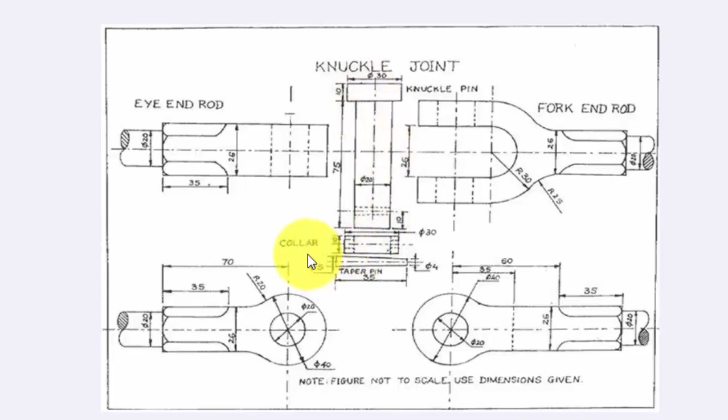So as you can see, there are three major components here. Let us see the detailed drawing. We are having an eye end rod, a fork end rod and a knuckle pin, and also there are some small components like collar and taper pin. So let us try to draw the components one by one, and finally we will assemble that.

Let us draw the first component, that is a fork end rod, today. Let us open the Catia software and go to Start, Mechanical Design, Part Design, and we are drawing this fork end rod. So let us name this as fork end.

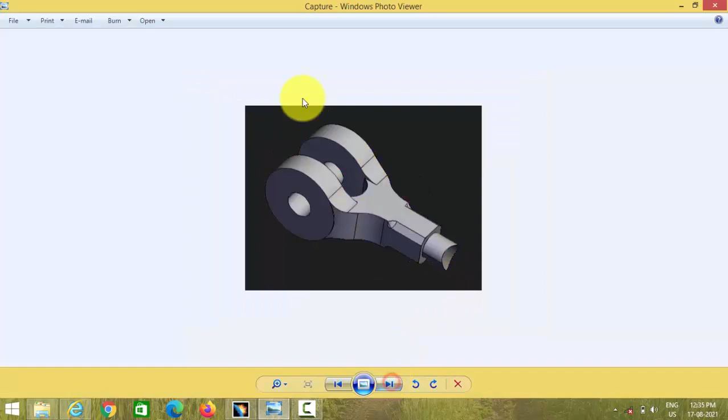Now we have to draw this component first. So in order to draw this component, we can draw this top face and we can extrude that, otherwise we can pad that. So for drawing this top surface, we have to draw this particular arc and this circle. So by drawing these two circles, we can start drawing.

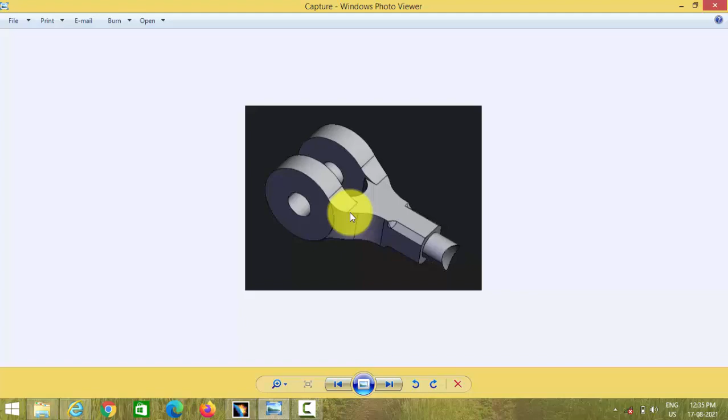So let us see the dimensions of those circles. This is having a radius of 30 mm and this is 26, so the inside radius will be 13. So let us draw two circles at the center. I am taking the top plane and starting sketch.

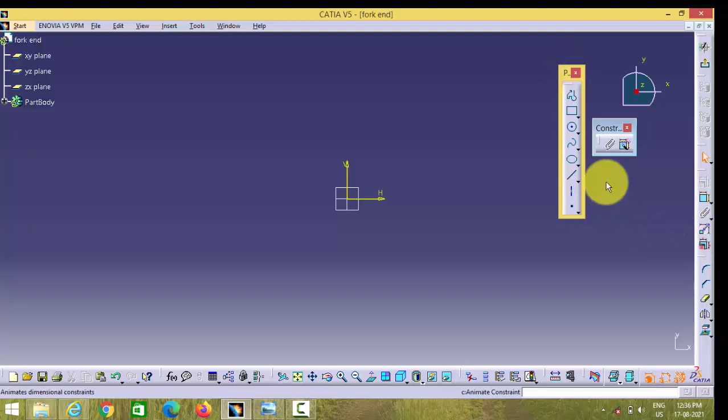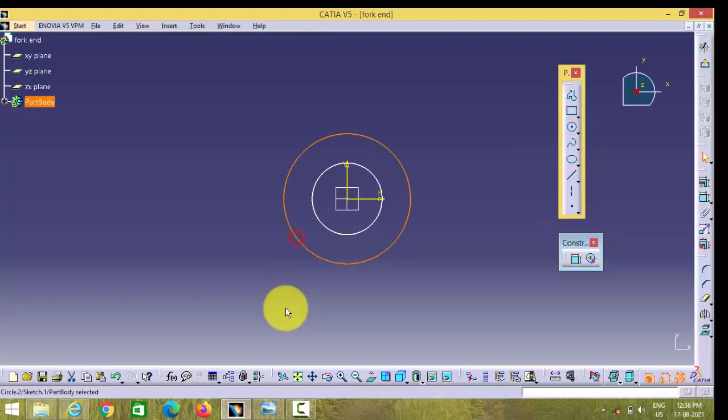So if you want the tools, we can drag that and we can place that anywhere. So I have taken this sketching toolbar as well as the constraints here. Okay, so let us draw two circles. That should be having radius of 30, another one is having radius of 13. So click that and go to this constraint, you will get the dimension.

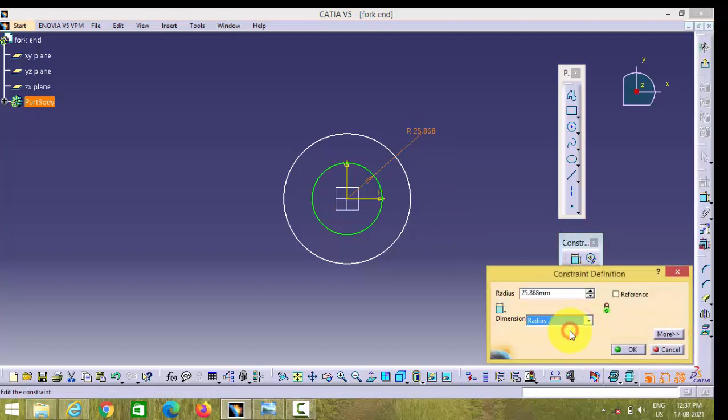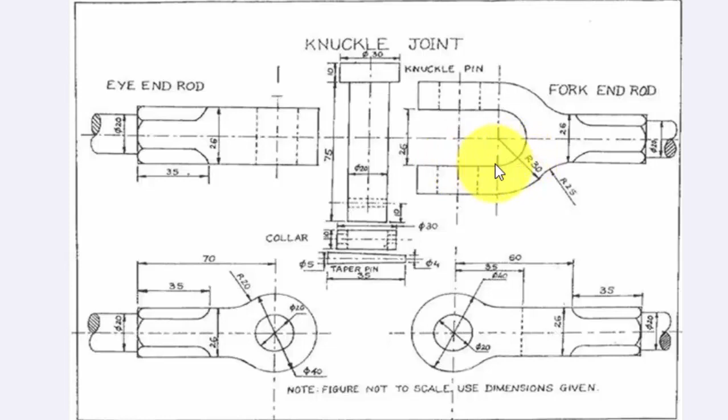So the dimension of this is, the radius is 13 mm and the radius of outside circle is 30 mm. We have drawn that. And then we have to draw two lines along this small circle that are tangent to that. So let us draw two lines, otherwise we can draw a rectangle.

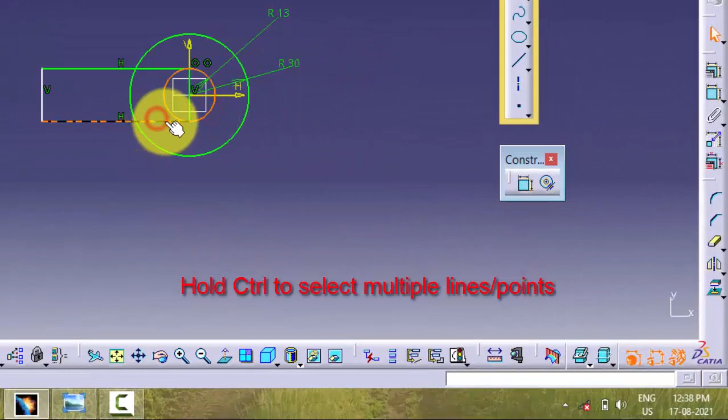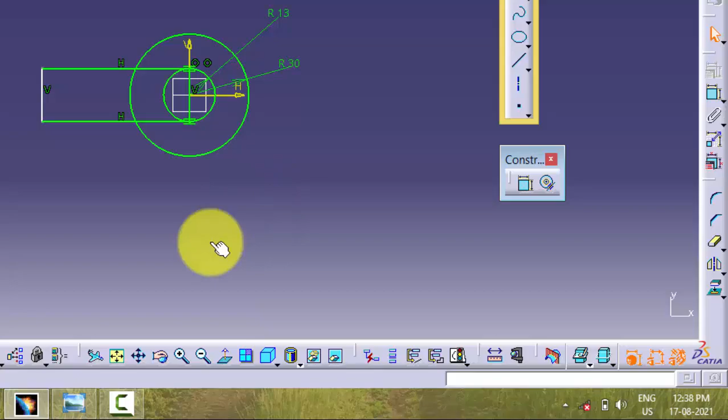Okay, we can specify this line as tangent to that circle. Okay, now we have drawn that line as a tangent to that circle. Here as you see, the dimension from this small circle to this point is 35 mm. So let us draw this rectangle up to 35 mm.

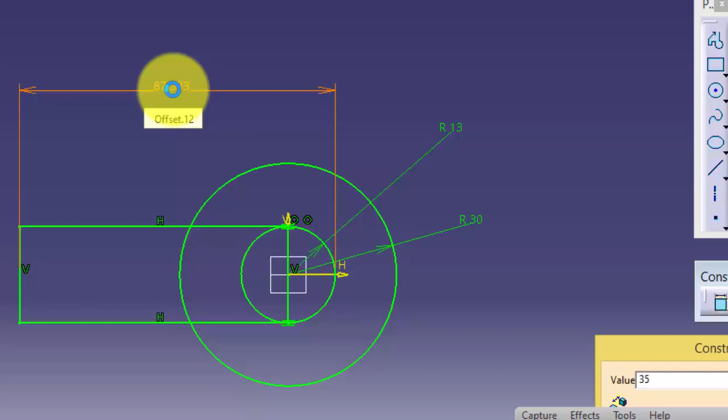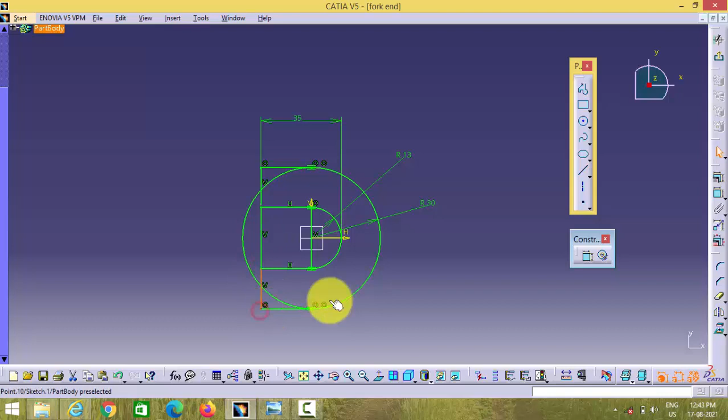This is 35 mm and we can trim these parts out. Here we can extend this line up to this point and we can draw a rectangle up to this point. So now we can trim these unwanted portions.

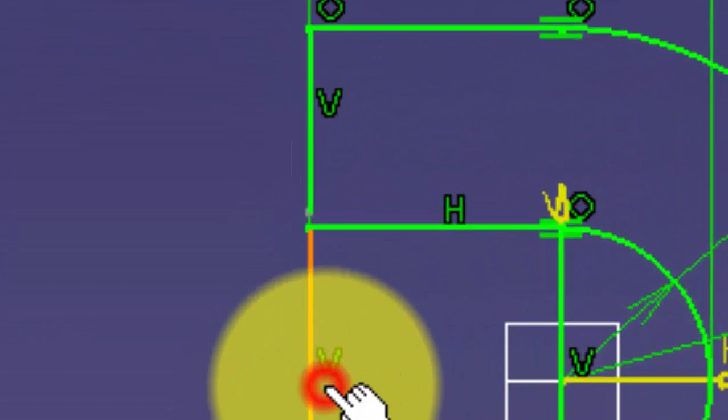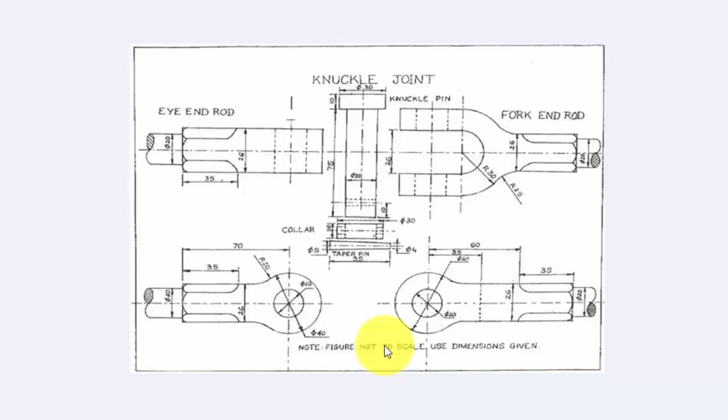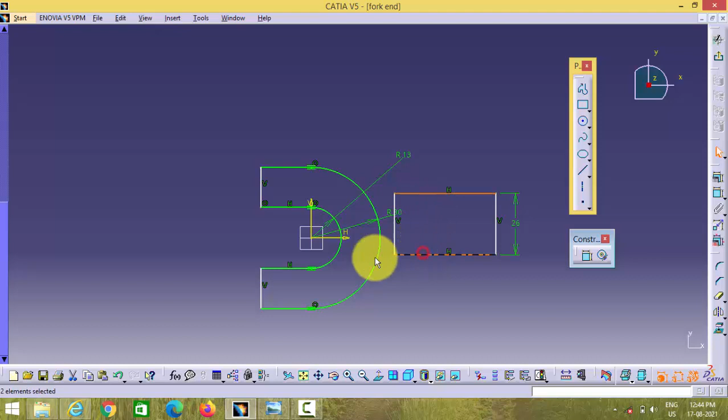These 2 points should be coincident, so let us give that as a constraint. Okay, here we are having a 26 mm square rod, so draw that 26 mm rectangle here. This rectangle is having a dimension of 26 mm and that should be symmetric to this center. So here we have to click these 3 lines and we have to give the constraint as symmetry. So now these 2 lines are symmetric to this.

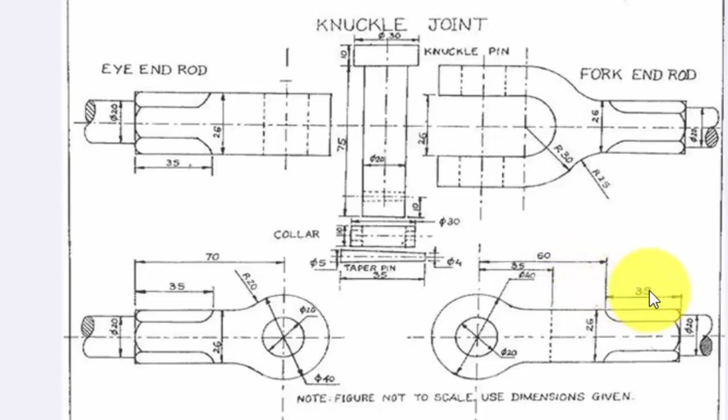Now let us see the length. From this point we are having 60 minus 35, so 25 mm here and 35 mm here. So 25 plus 35, 60. From this point we are having 60 mm here. From the small circle we are having 60 mm.

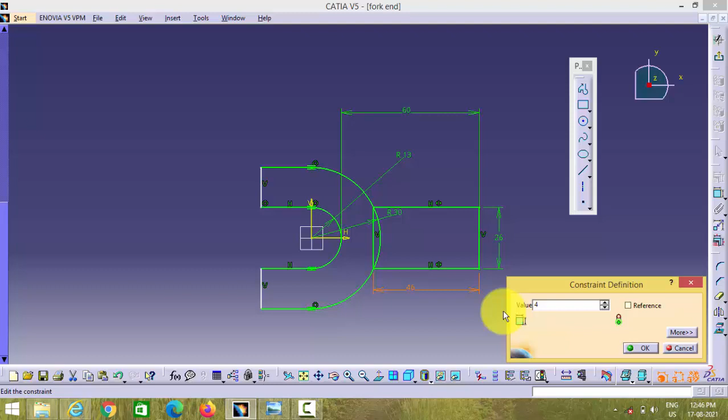Okay, now let us extend this line in order to trim that. This is actually 46. Let us make this as 48 so that it is easy to trim. Okay, now use this trim option and trim out these lines. Okay, now we have drawn this part and here also we are having a circle like thing. So let us try to pad this.

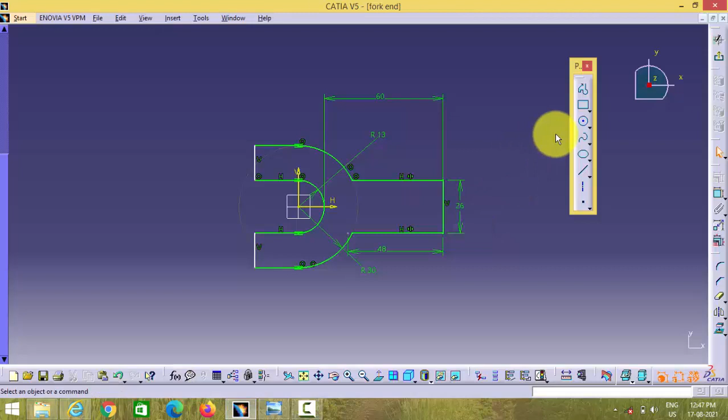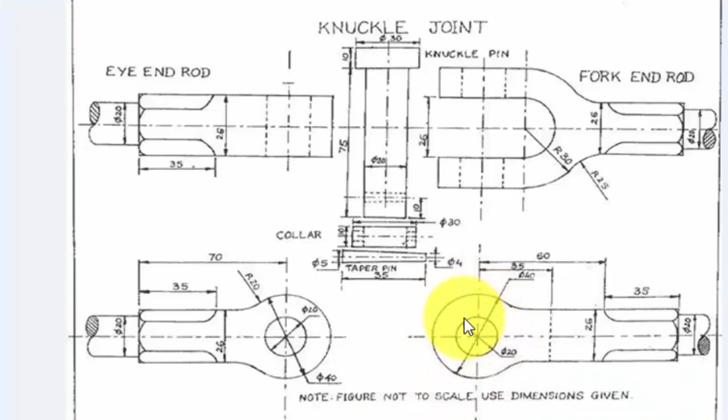Exit the sketch and go to pad, and we are having a dimension of, this is the top view of this, it is having 26 mm. So let us give 26 mm. So now we have created that partially. Now we have to create this circular portion here. We have drawn up to this particular point. So we have to create a circle over here, and from that circle we have to create this pad.

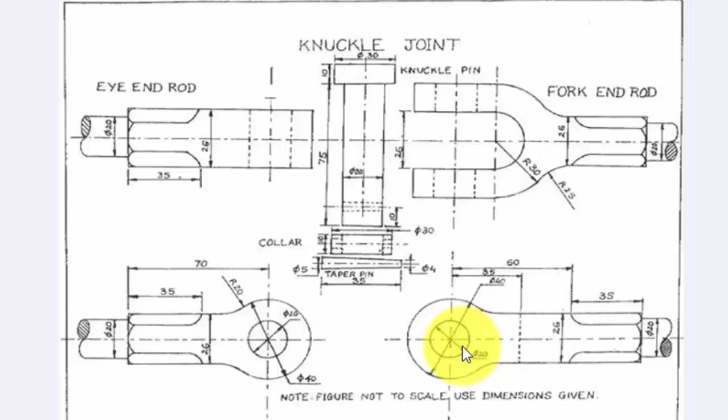Just select the surface and give sketch. So here we can draw a construction line. Okay, here we have to draw a circle. That circle should be having a diameter of 40 mm, so the radius should be 20 mm. Radius is 20 mm.

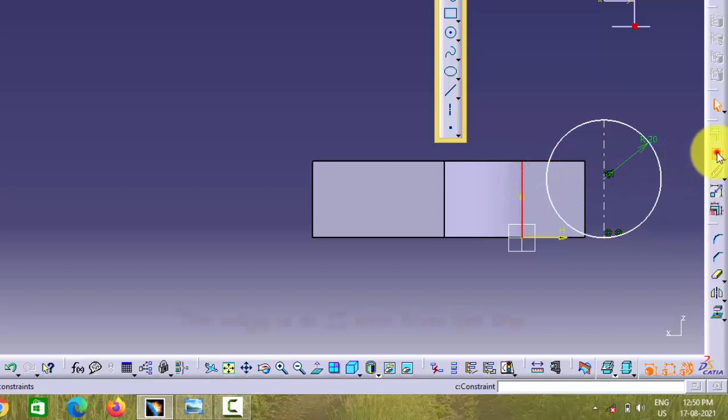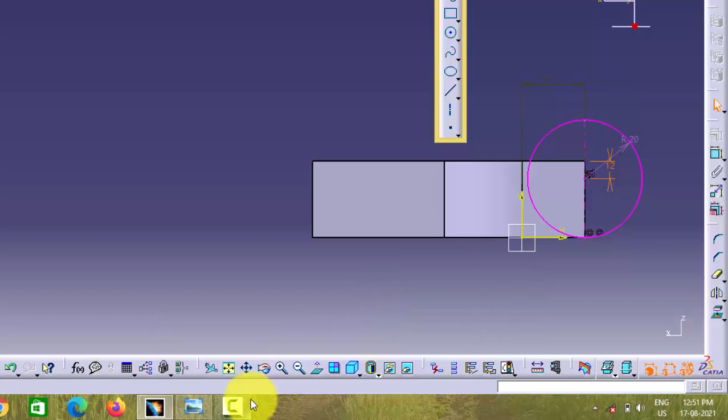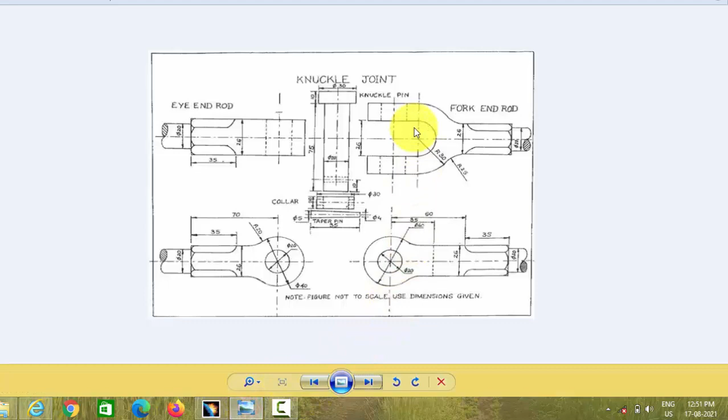Okay, now we have to keep this center point exactly at the center. So the total dimension is 24 mm, so if you give 12 mm, that will go to the center. Okay, now we can exit the sketch and pad this. Go to pad and we can reverse the direction, and we need to pad this for the dimension of 30 minus 13, that is 17 mm.

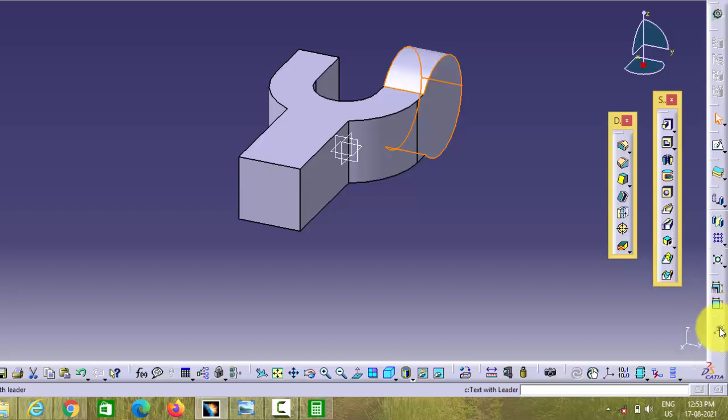Okay, now we have created that. So what we have to do is we have to mirror this to that other side. So select that object, select that pad and go to the mirror option. Here it is, and select the plane, and it will be mirrored like this. So now we have got this shape.

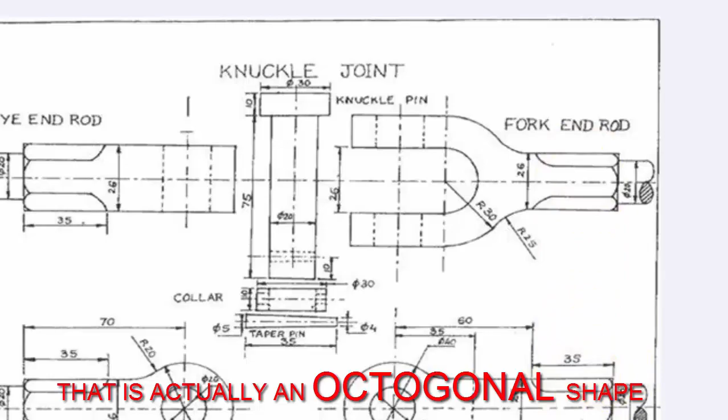So now we have to create an octagonal face like this here, up to 35 mm. So here we have to create an octagonal face. Already we have created that as a square, so now we have to change that to an octagon. So create a sketch there and draw an octagon.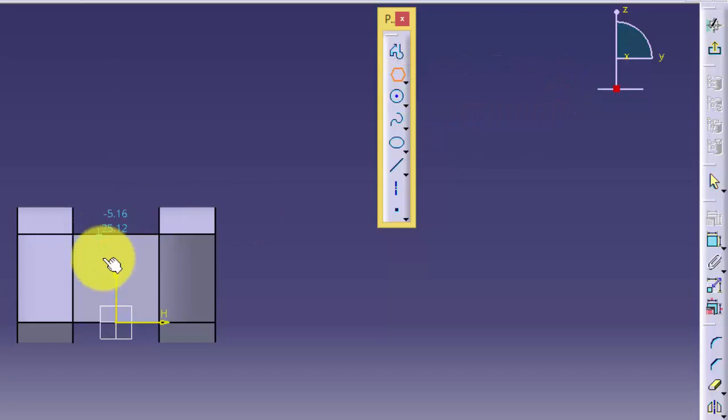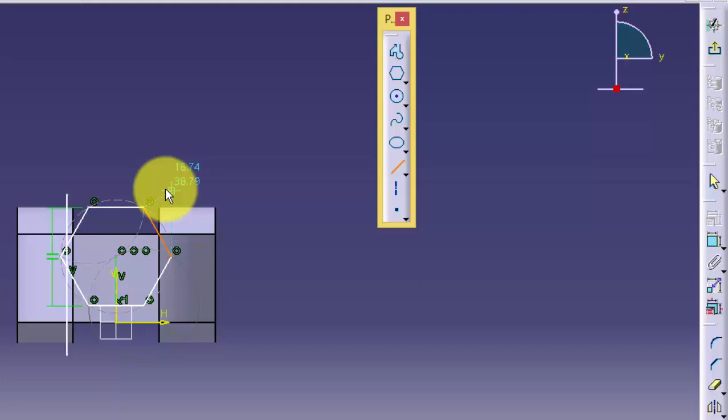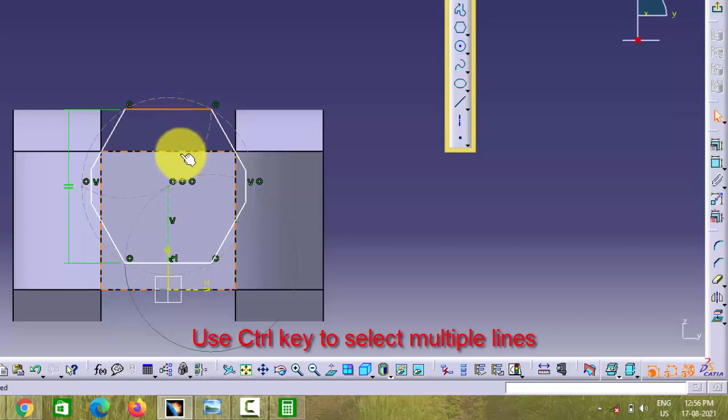Okay, make that hexagon into an octagon. Okay, now trim this. Trim the unwanted portion to make this hexagon an octagon. Okay, then let us give the constraints. So this particular line should be here. So select both the lines, go to constraint and give coincidence.

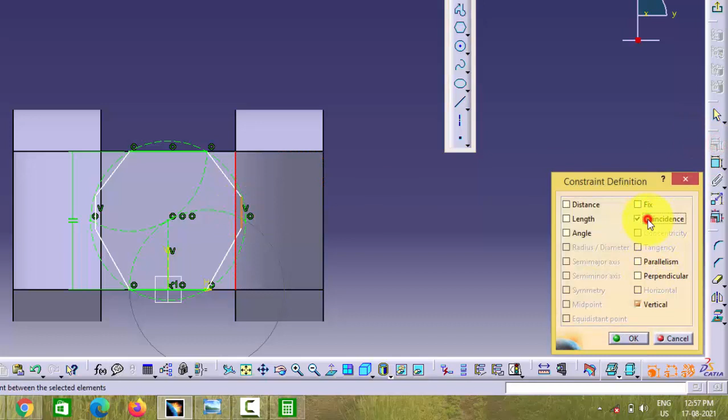Okay, similarly this line should be here. So give that constraint and give coincidence. Also this line should be here. Okay, then give dimensions for this. If you don't know the dimension of any part, just assume a dimension, that's not a problem.

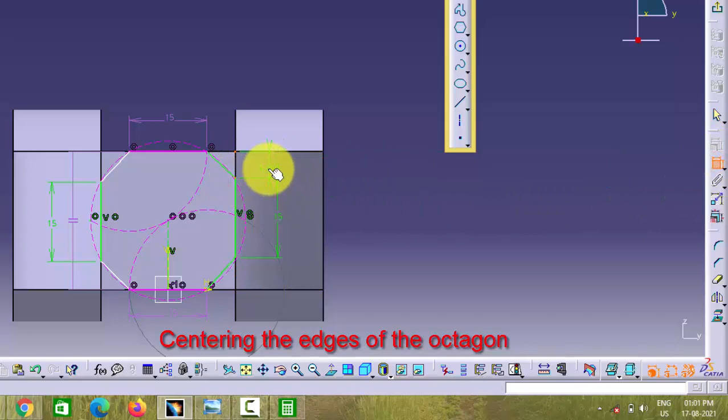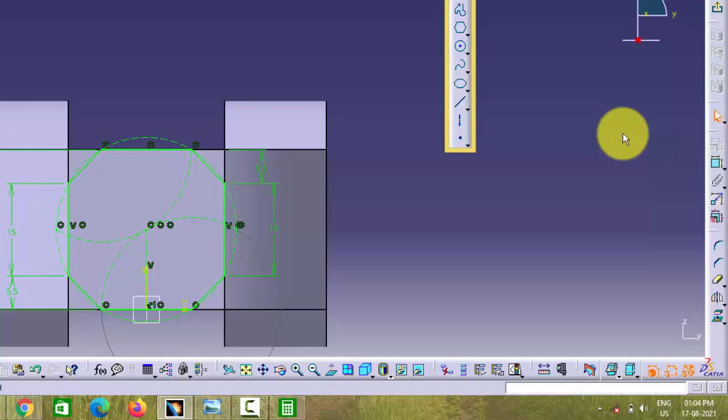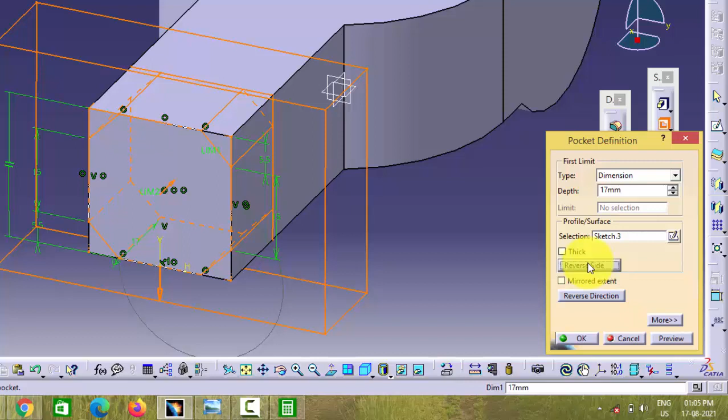Eleven mm will be remaining, so let us give 5.5 mm here. Okay, now let us give the pocket option and reverse the direction. Reverse this side, so the outer side will be removed, and let us give a depth of 17 mm.

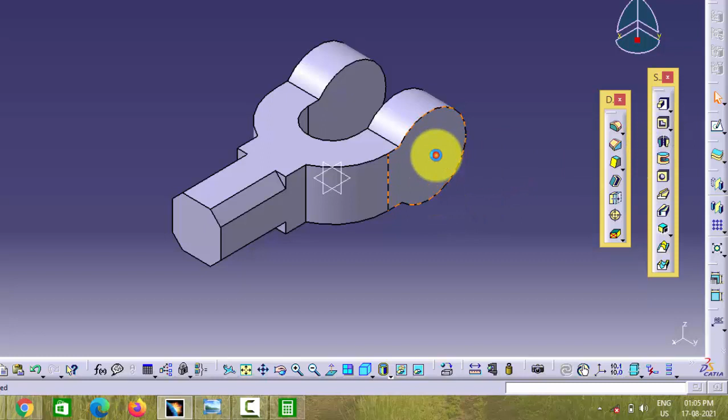Okay, now we got what we want, and now we have to create a hole over here. For that you can use the hole option, otherwise we can simply sketch it and use the pocket option. The diameter of the hole is 20 mm, and the depth is up to last.

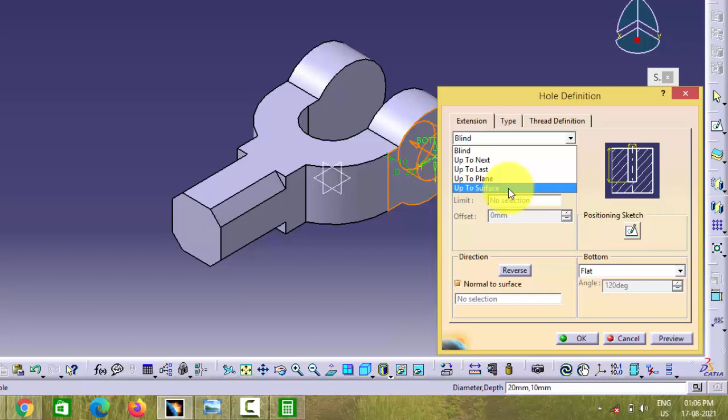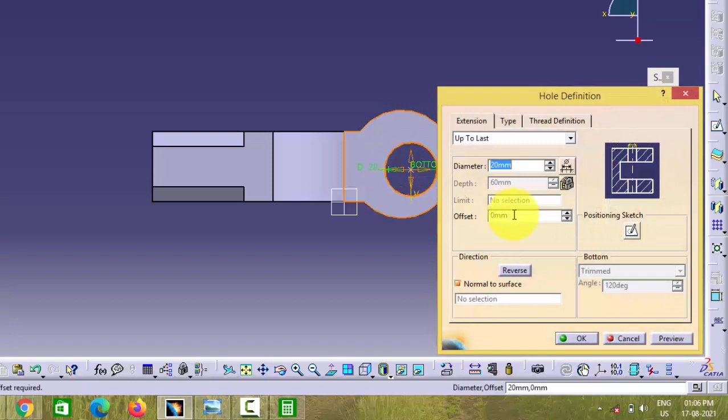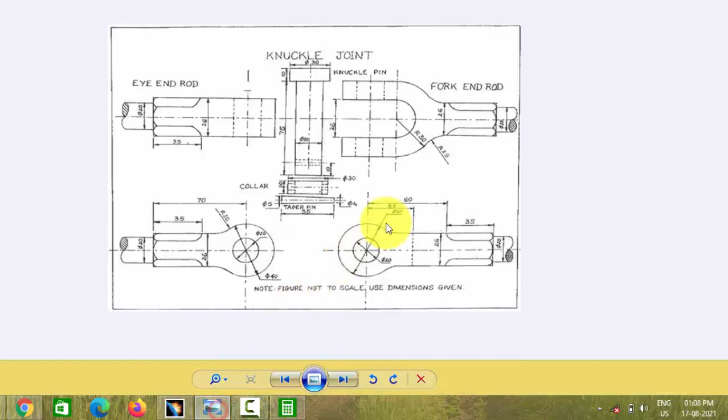So now the center is not exactly positioned. 60 mm from this fillet. Okay, now let us try to use that. This is 60 mm. And this is 26 by 2, that is 13. Okay, now it is centered correctly.

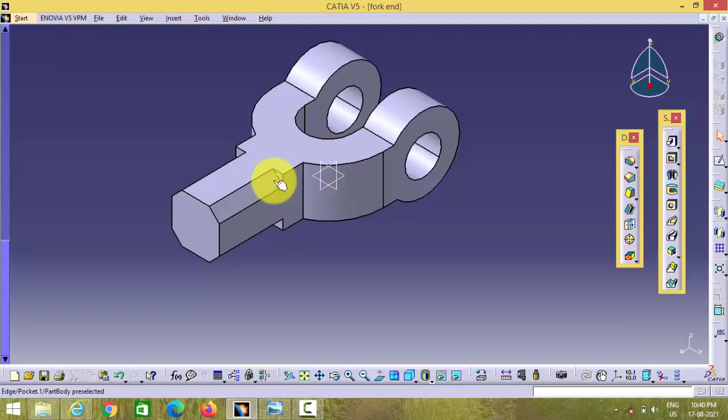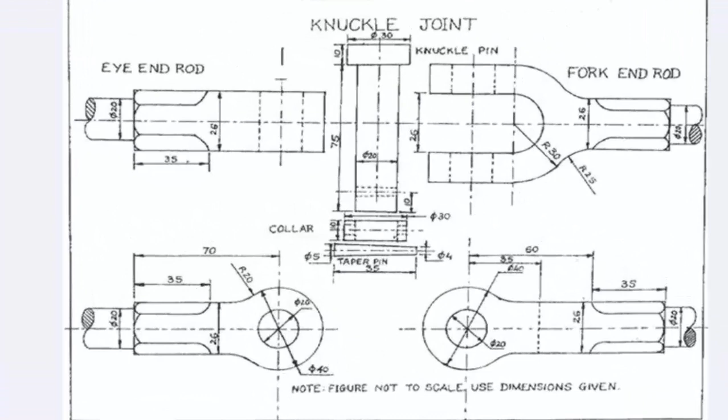Okay, now we have to add some fillets here, here and here to make these surfaces smooth, or make this a curvy surface, as you can see here. This curvy surface can be obtained by using an option called fillet. Let us see the dimensions of the fillets in this sheet. Here this fillet radius is 25 mm, and this radius is not given. Let us take that from the other diagram, that is 20 mm.

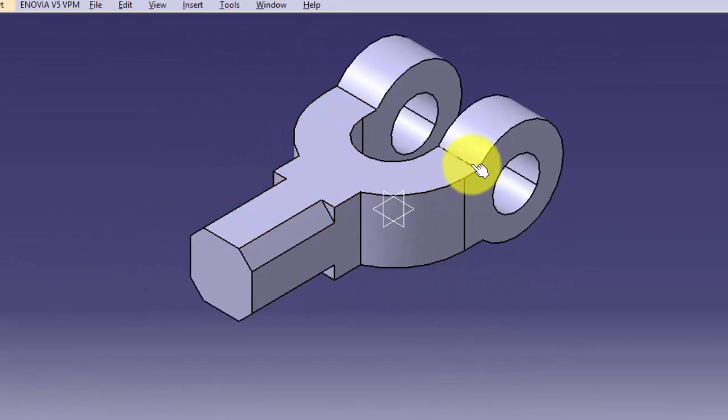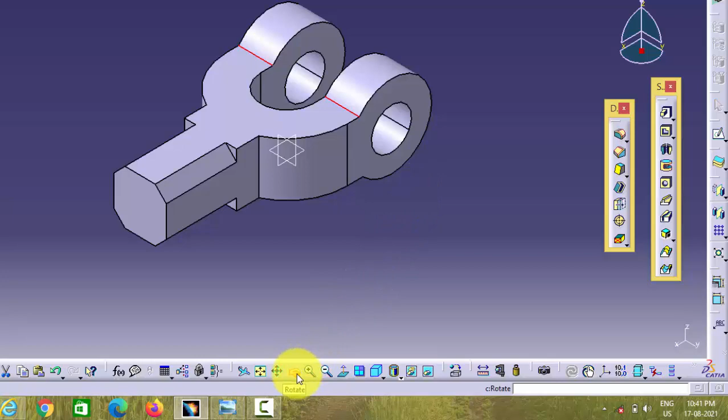So let us give 25 mm here and 20 mm here, and here also there is some fillet, but this dimension is not given, so let us assume some value. Let us select all these 4 edges. If you want to rotate, click this rotate button. Use the control button to select multiple edges and give this edge fillet.

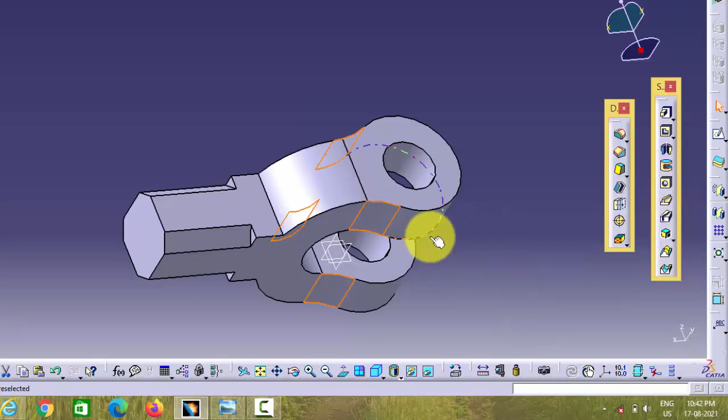As given in this diagram, let us give this dimension as 25 mm. So now we can see the fillet is created for 25 mm here. Similarly here, actually this is 25 mm. The fillet here is actually 20 mm. Okay, so here the fillet is created, here also, and let us create a small fillet here.

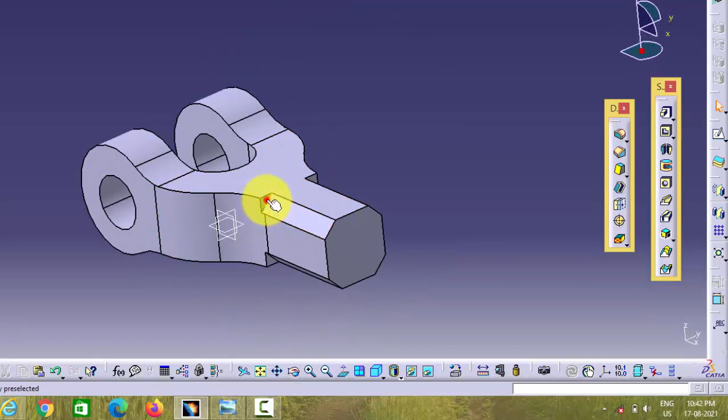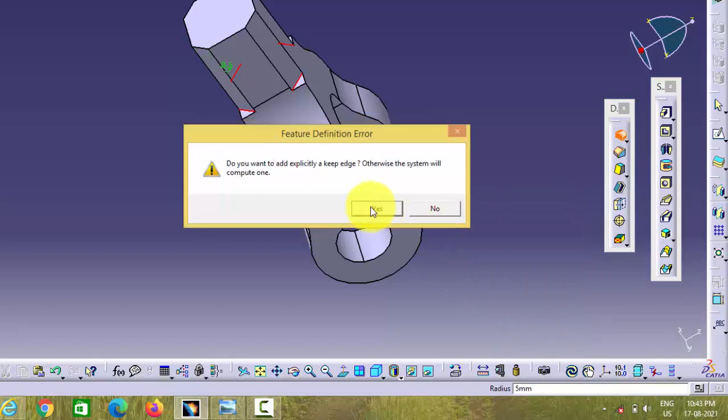Three and 4. So let us give a small dimension like 5 mm. I think that's enough. Even 5 mm cannot be, so let us give that as 2 mm. Okay, now a small fillet is given here. This will give you an isometric view. So now we have created what we want.

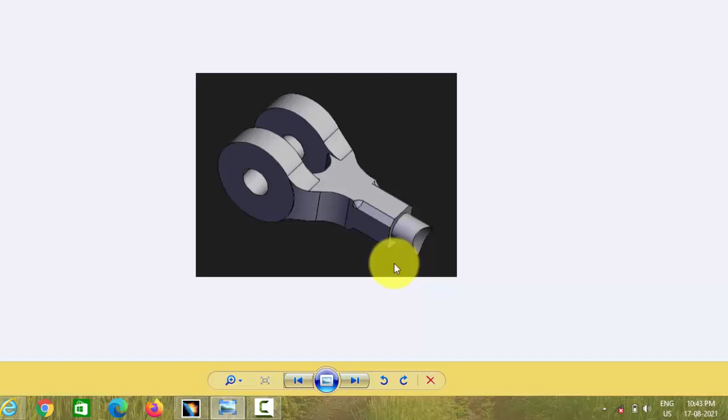Also there is a circular extension here. For creating that, we can simply pad by creating a circle. Let us see the dimensions. It has a diameter of 20 mm, and we can have a small length like 15 mm or as you like. So let us create a small circle over here, click the surface and give sketch.

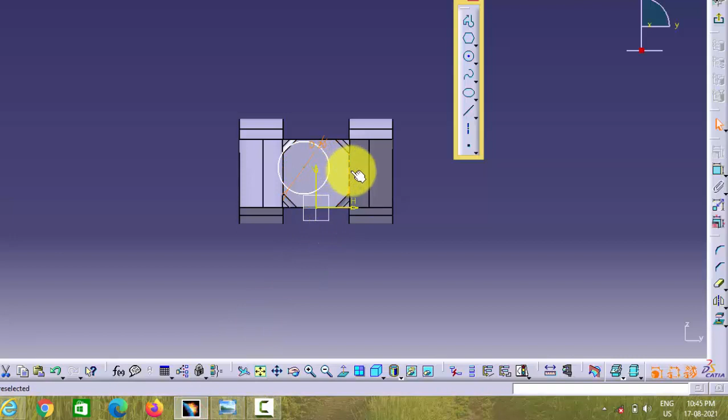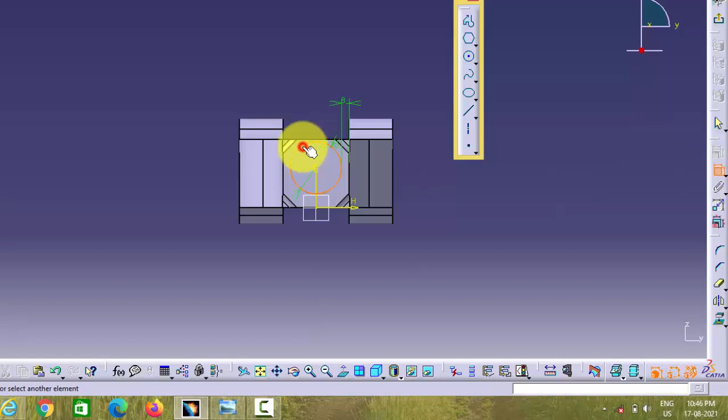We know that the width of this square block is 24 mm, sorry, 26 mm. So 6 mm should be left over there, 3 on the left hand side and 3 on the right hand side. Let us give that dimension. This is 3 mm. Similarly 3 on the top side and 3 on the bottom side. Okay, now the circle has been centered.

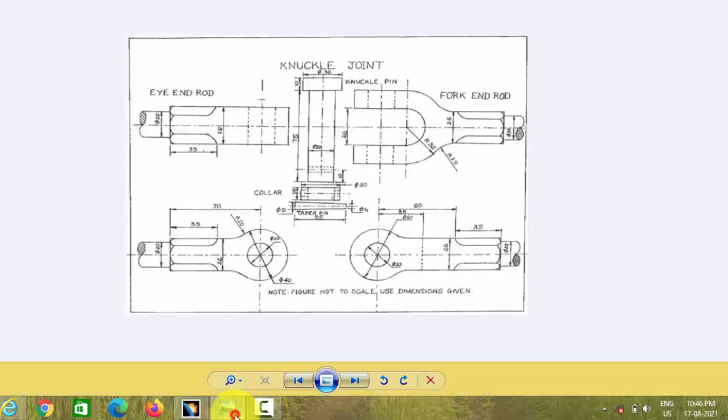Let us exit the sketch and give the pad option. Let us give some value like 15 mm. Actually that is not given in the question, I think. Yes, that length is not given. Let us take that value as 15 mm, and now we have created what we want.

Okay, then we have to create other parts. You can try on your own to create other parts, and we can do the assembly. Otherwise we will continue that in the next class.